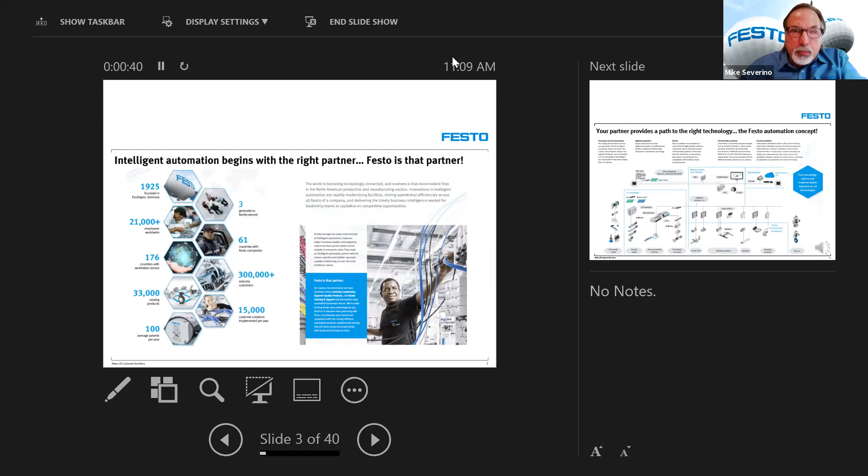Intelligent automation begins with the right partner. Festo is that partner. Founded in 1925, we have over 21,000 employees, 33,000 catalog products. We're privately owned, and we have the flexibility and expertise to serve our customers.

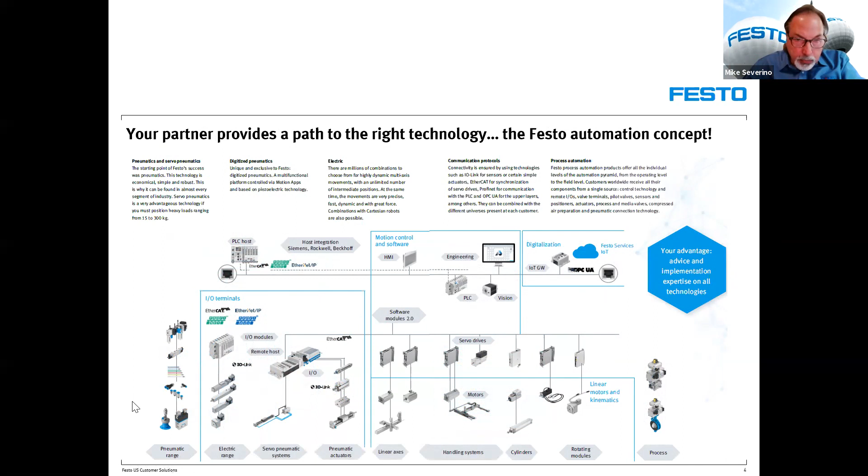Your partner provides a path to the right technology. Let's take a look at the Festo automation concept. Products ranging from pneumatics to electric to process automation, all that can be combined in one common architecture due to our open connectivity.

Our products and solutions are widely applied in a variety of industries. We back that up with a group of dedicated industry specialists. Our industry-specific solutions are tailored to your needs. What makes Festo unique is that we offer a wide range of products and solutions for factory, process, and lab automation. And within our standard catalog product offering, we can customize those to meet your specific needs.

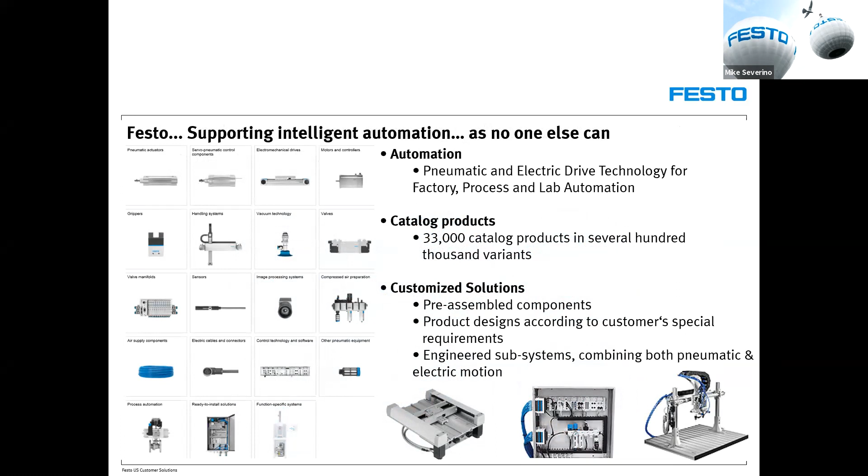Here's an overview of our pneumatic technology products. They range from air supply to fittings, actuators, grippers, and a multitude of valves and valve manifolds.

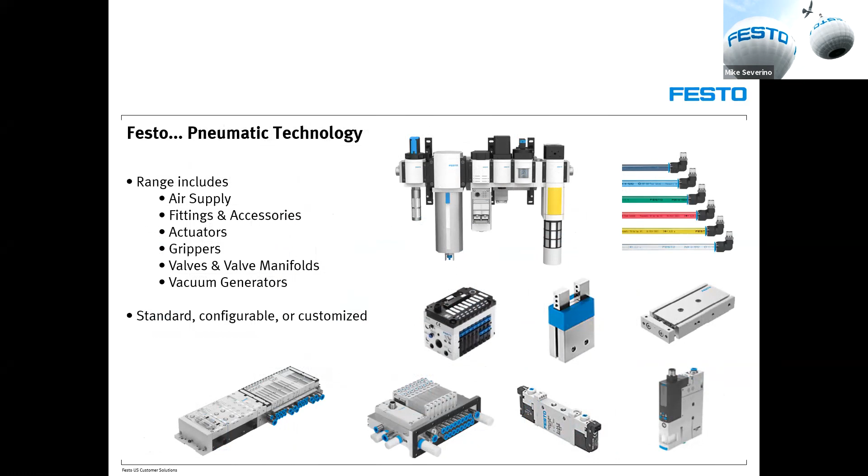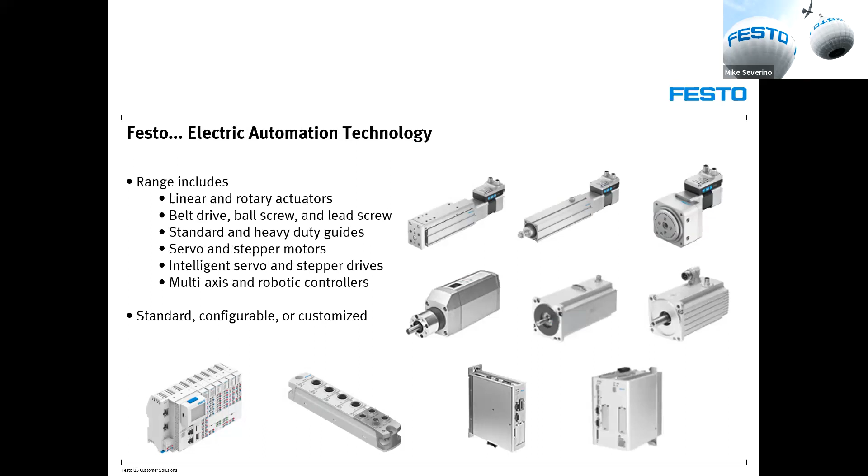Our electric automation products include linear and rotary actuators, servo and stepper motors, intelligent drives, and controllers. For a higher level control, we offer standalone PLCs for I/O and motion control. In addition, we can integrate the PLCs via our HMI, valve terminals, and machine vision.

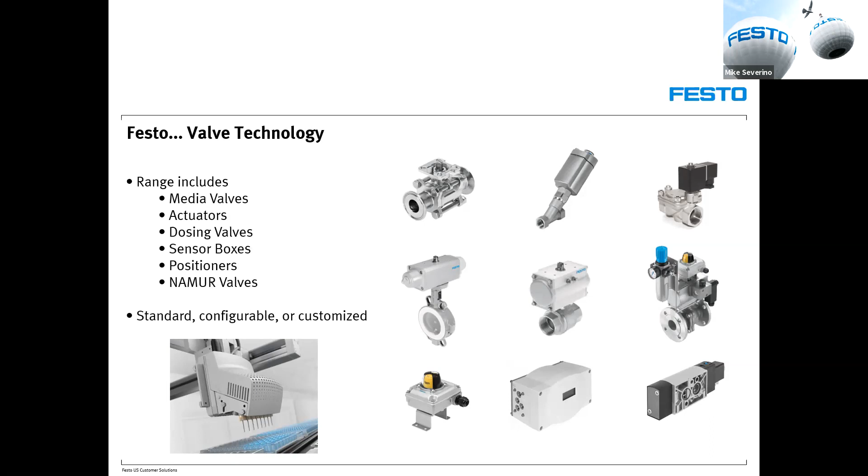And finally, our valve technology products, which range from the media valves to dosing valves to Namur pilot valves, and the accessories that provide control and feedback.

So how does that benefit you? Well, we can provide a complete automation solution from a single source. And at the core of that solution would be our CPX/MPA manifold.

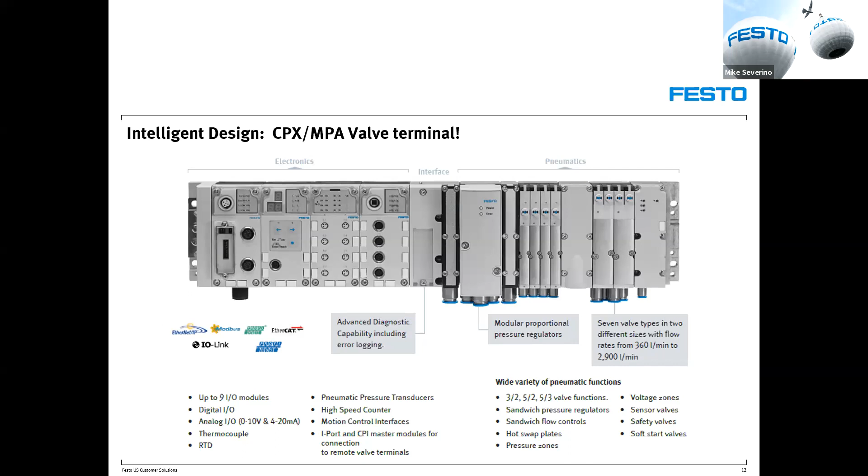As illustrated here, our flagship CPX/MPA valve terminal provides the ability to combine the electronics and pneumatics on a single node for easy integration into existing control platforms. And when you take full advantage of the diagnostics features built into the CPX/MPA, you can rest assured that any downtime will be minimized or avoided.

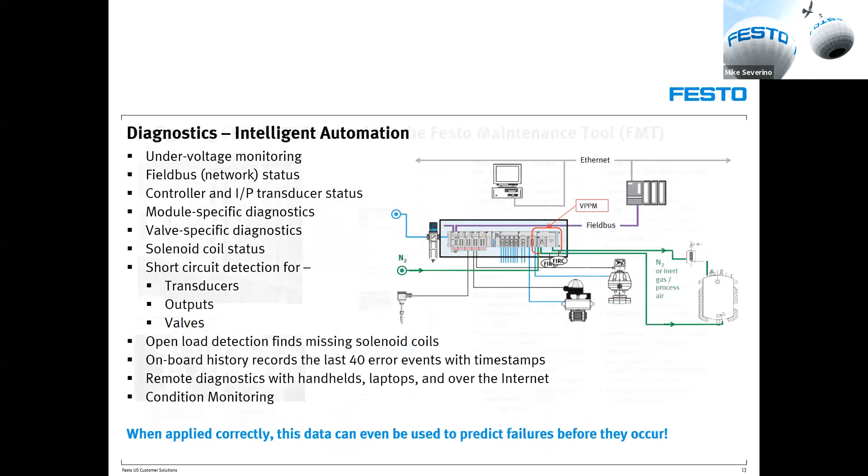So, how do we go about configuring the CPX/MPA terminal? Well, that's done via our Festo Maintenance Tool. It provides commissioning, testing, and configuration of the CPX valve terminal for a wide range of control platforms.

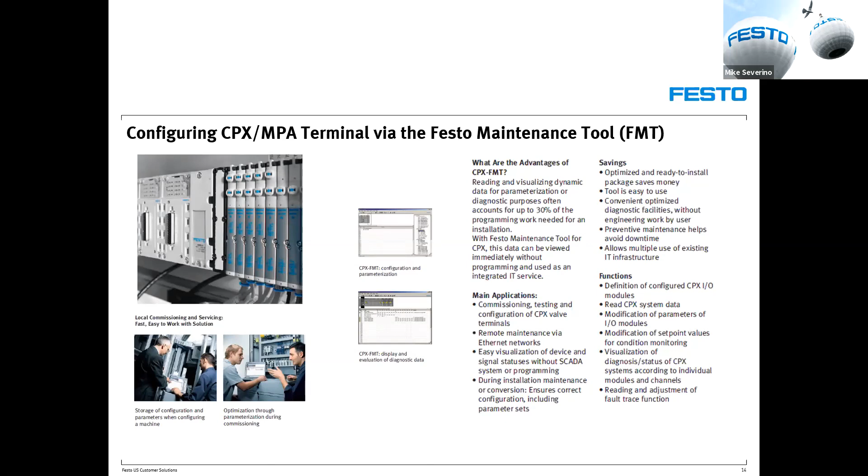One of the main features of the Festo Maintenance Tool is that once you go online, it'll provide an automatic configuration of the hardware. But if you choose to configure offline prior to receiving the hardware, you have that option as well.

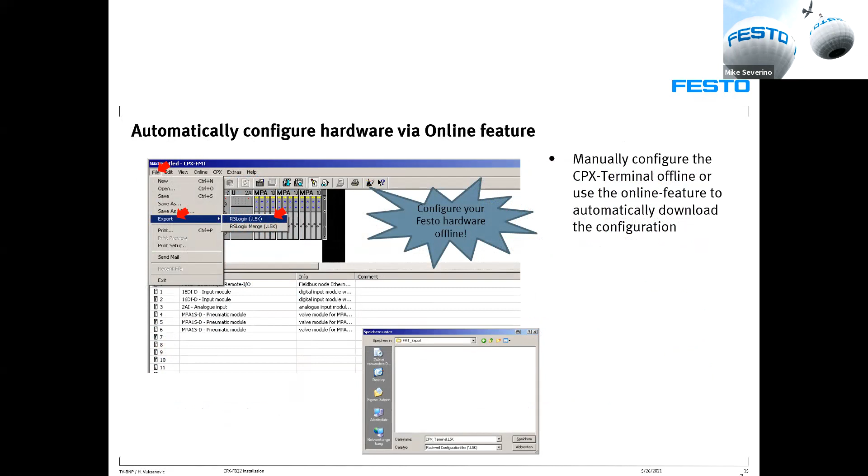Seamless integration to DCS and PLC systems is possible with Festo Maintenance Tool's export function. By utilizing this function, you can export all the tag structure information, including data mapping and description, and all the signal properties, including scaling and diagnostics, into a config file, and export it to some of the major controllers listed below.

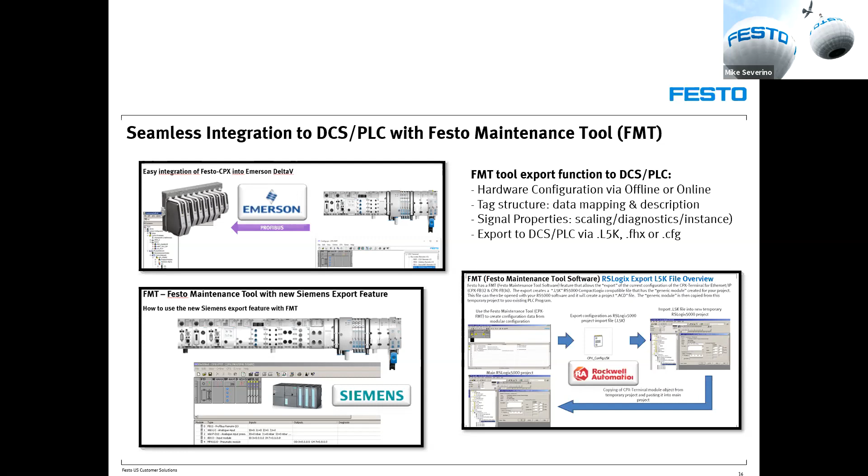Here's an example of the L5K export function. The first step, we would go online with the Festo Maintenance Tool to create the hardware config file. We would save that as an L5K and export that into RSLogix via a working project.

We would select the software version and controller type. We would then copy and paste that file from a temporary project to the main project, and then download to the Rockwell controller.

This feature will save up to 30% in engineering and development time.

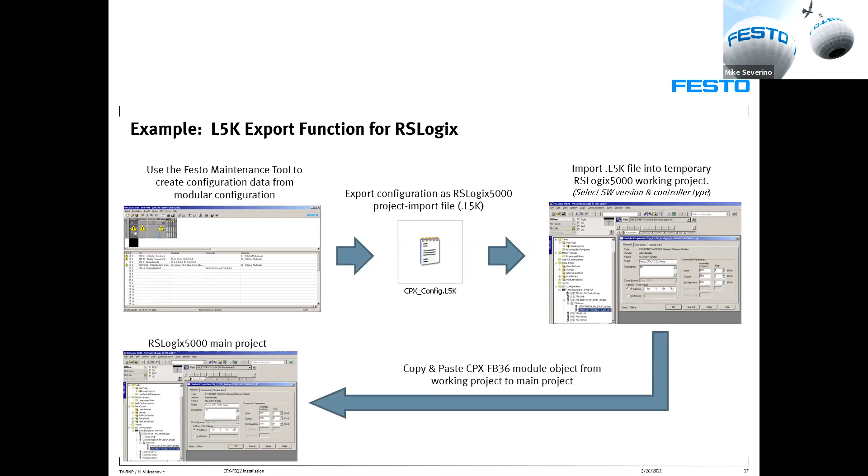So what are the benefits of the imported configuration into RSLogix? We end up with the correct data format and I/O size for all the devices on the CPX terminal. In addition, all the CPX parameters are stored in the RSLogix controller, including all the data mapping and tag descriptions.

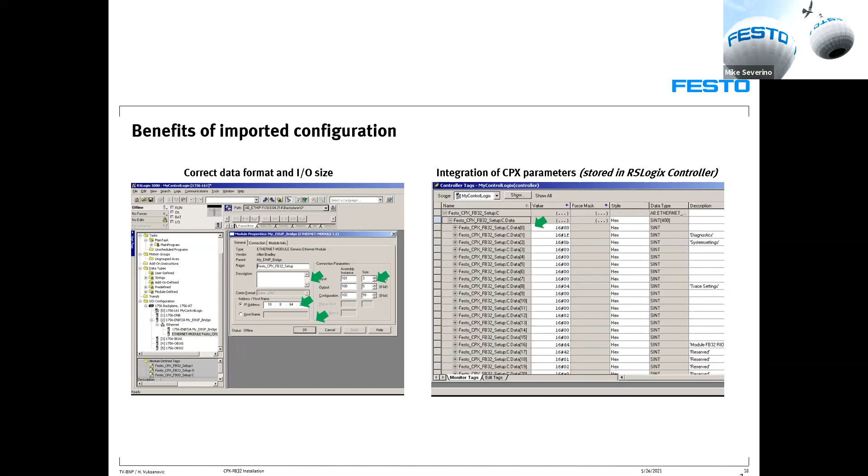Now let's discuss control cabinet design options for both process and factory automation.

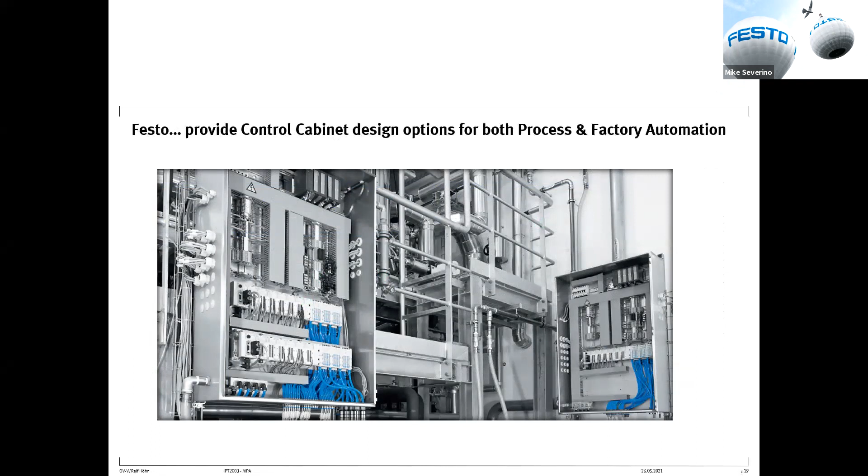Another aspect that makes Festo very unique is our Customer Solutions Group. They can provide a wide range of control cabinets suitable for factory automation, process automation, and handling systems. We can tailor those cabinets to meet your specific requirements and provide a mix of technologies.

At the end of the day, this is going to save time and cost for a ready-to-install cabinet solution, all from a single source.

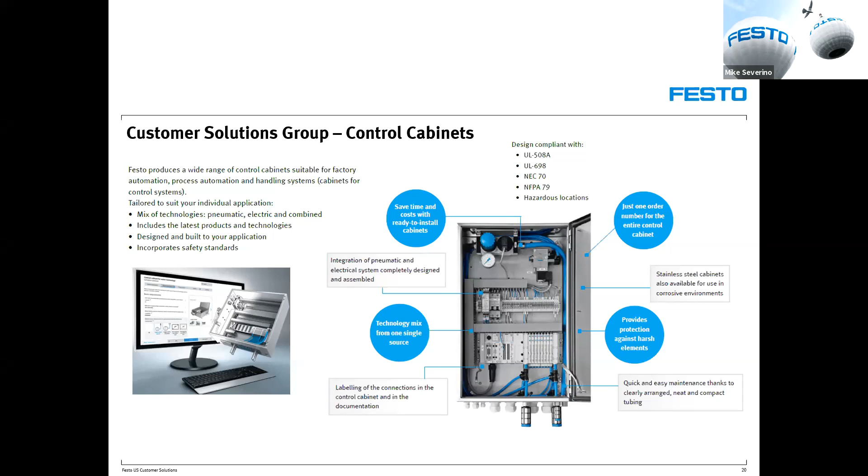As you can see here, we can provide a myriad of products for your control cabinet solution, and we'll test assemble this at one of our three factories and ship it to you for a ready-to-install solution. It'll include the complete turnover documentation package, and we can even provide startup assistance during commissioning and validation.

Our Customer Solutions Group has the ability to support large-scale projects. With factory locations in New York, California, and Ohio, we can support projects like MedImmune, where Festo supplied over 160 custom and standard design solenoid cabinets.

Or a greenfield project like Takeda, where Festo supplied over 200 standard and custom solenoid cabinets, or a plant expansion like GSK Montana, where we provided 50 standard design cabinets.

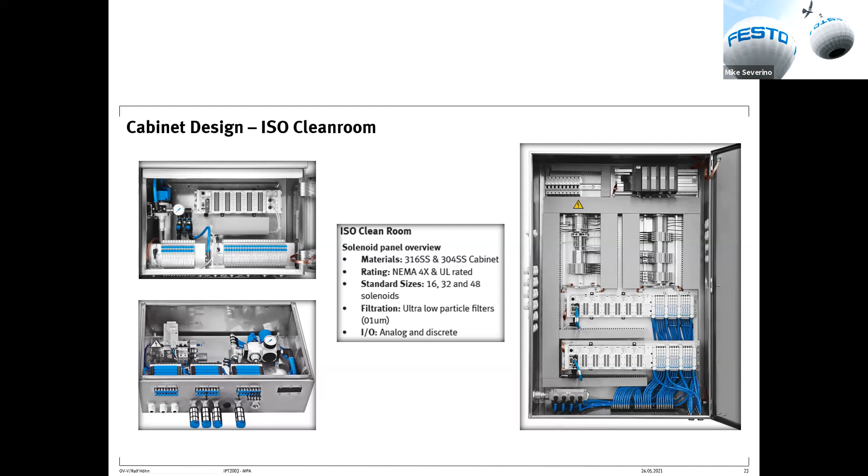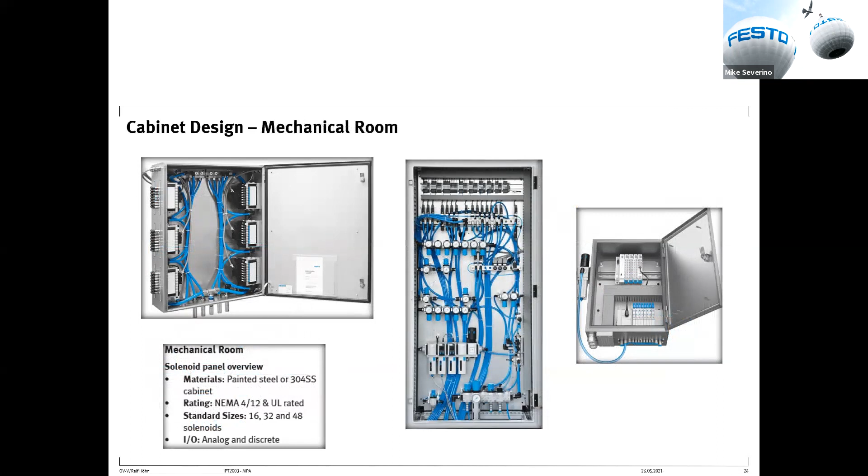And finally, the hazardous area, where it's imperative to have intrinsically safe I/O, Class 1 Div 2 rated components, and a NEMA 4X tight enclosure.

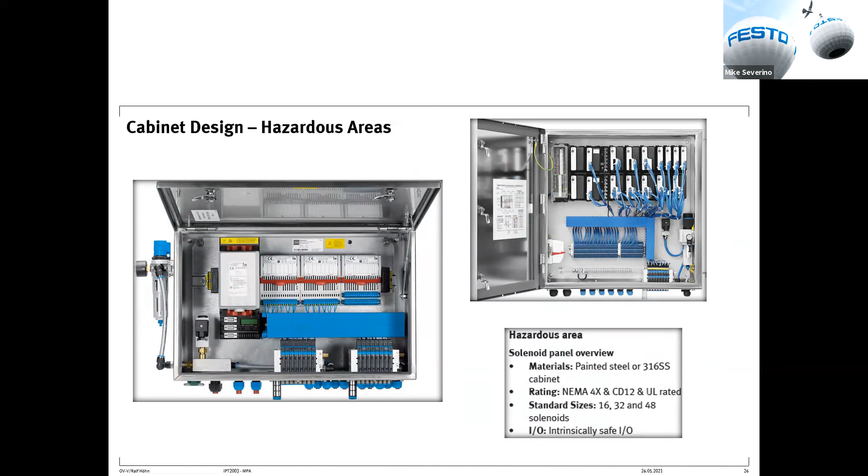Let's take a look at the energy efficiency module, the E2m.

Today, end users are wanting more intelligence and energy savings built into their manufacturing processes. This means they want automation equipment that utilizes smart devices capable of collecting real-time data from their processes and turning it into saving both time and money.

The E2m was designed to save energy by automatically shutting off the supply of air to a machine that has been sitting idle. This eliminates the continuous consumption of air due to system leakage, resulting in significant energy savings. Additionally, the E2m can monitor the machine's performance by collecting data on pressure, flow, and air consumption, assuring that the machine is operating at peak efficiency.

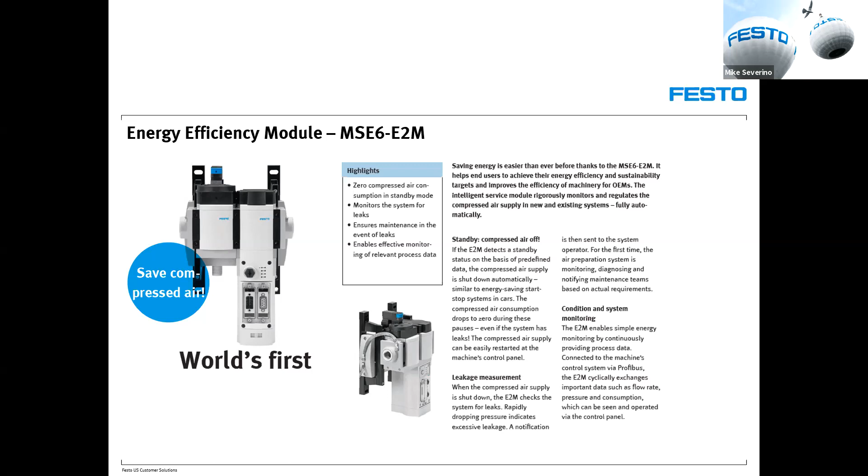The E2m modules comprise an electric on-off valve that's normally open, an interface for integration into Festo's MS6 series air prep system, a power supply, a flow rate sensor, an integrated pressure sensor, status indicators, and you choose your field bus.

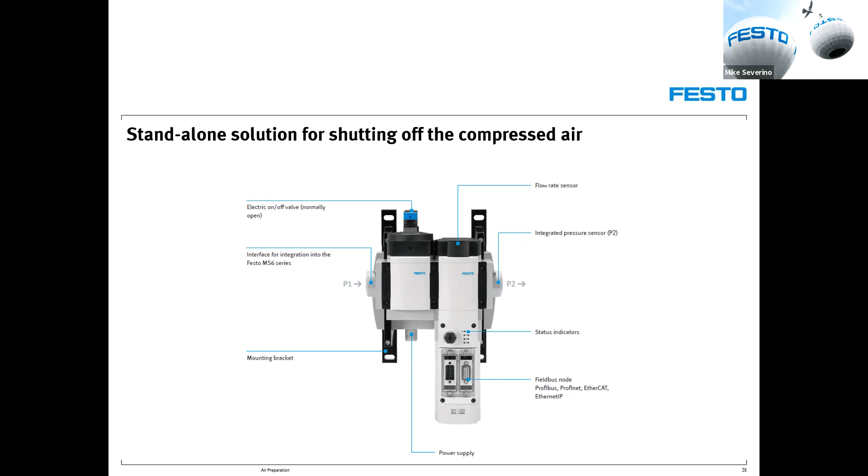In summary, the E2m collects data through continuous process monitoring of flow, pressure, and air consumption, and machine cycles, helping prevent costly unplanned maintenance and assuring optimal performance.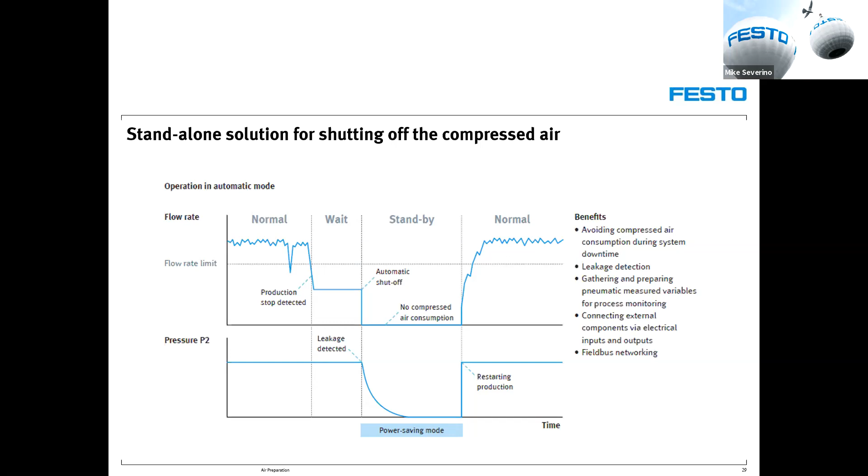You may ask, how much can the E2m save on an annual basis? Well, the example below is for a machine that has a flow rate of 5,000 liters per minute. Assuming a 20% leakage rate, a production time of 16 hours per day, standby time of 8 hours per day, and 265 productive days, using the calculation tool below, with the MSE6 E2m, you could save nearly $2,500 per year.

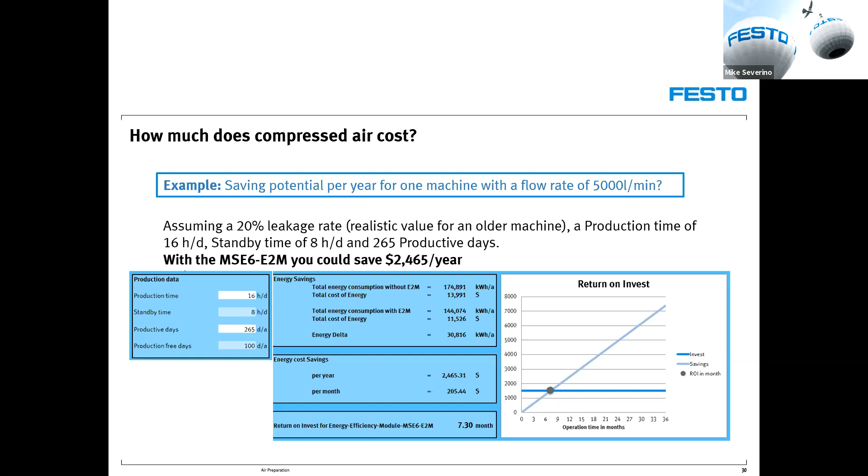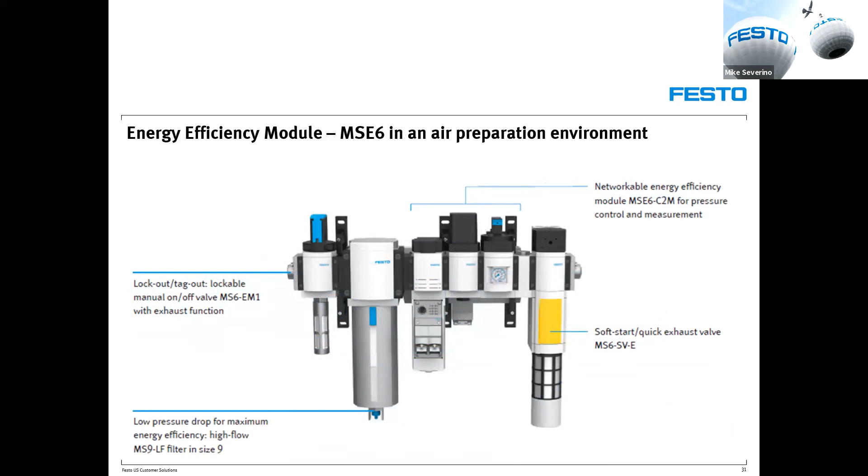In addition to standalone mode, the energy efficiency module can be integrated into the MS6 air preparation system, as shown here.

Now let's talk digital pneumatics. The Festo Motion Terminal VTEM is the world's first valve to be controlled using apps. Our motion apps allow you to integrate many functions using standardized hardware. Functions can simply be switched at the touch of a button.

Thanks to comprehensive diagnostics, condition monitoring, and improved maintenance, productivity is increased and production complexity is reduced.

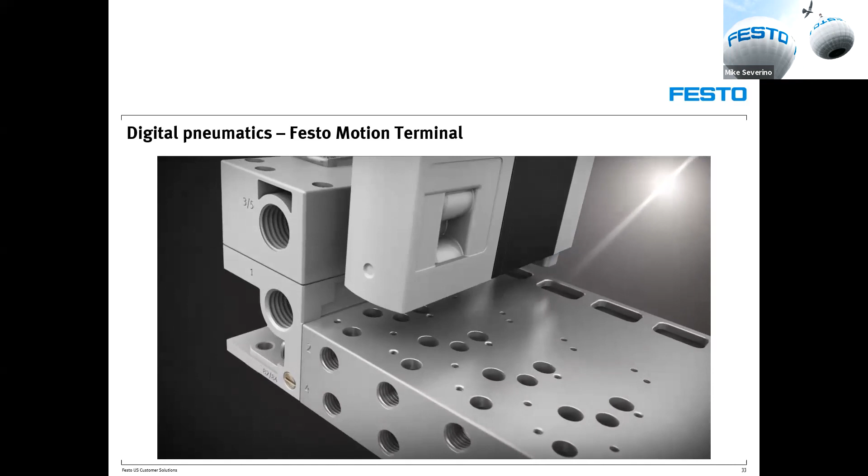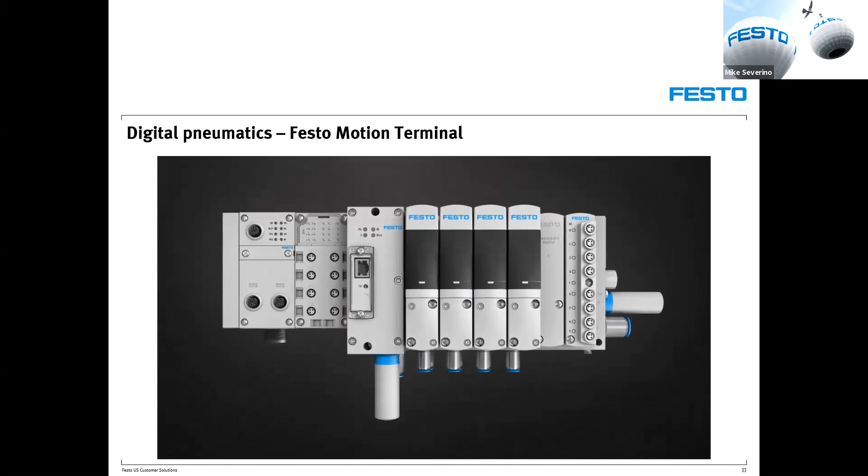Discover a new level of flexibility, one piece of hardware for all functions. Numerous functions can be combined with the same hardware, possible for the first time with the VTEM. No modification, no additional parts, no arduous installation, none of that is needed anymore.

With the matching Motion app, you can change functions at the press of a button, whether for a simple change in the directional control valve functions, general travel in the end positions, energy efficiency movements, or proportional characteristics of the motion profiles. That is how the Festo Motion Terminal combines the benefits of both electric and pneumatic automation.

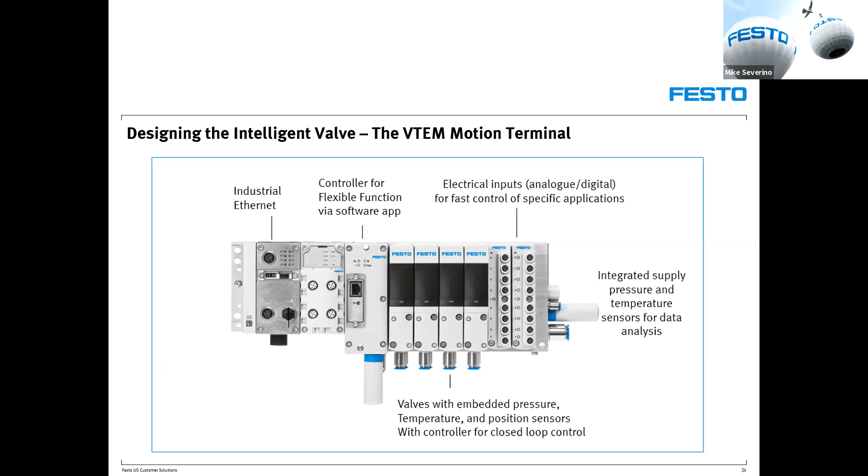As you can see here, the Motion Terminal replaces over 50 components with one piece of hardware and combines the benefits of electric and pneumatic technology.

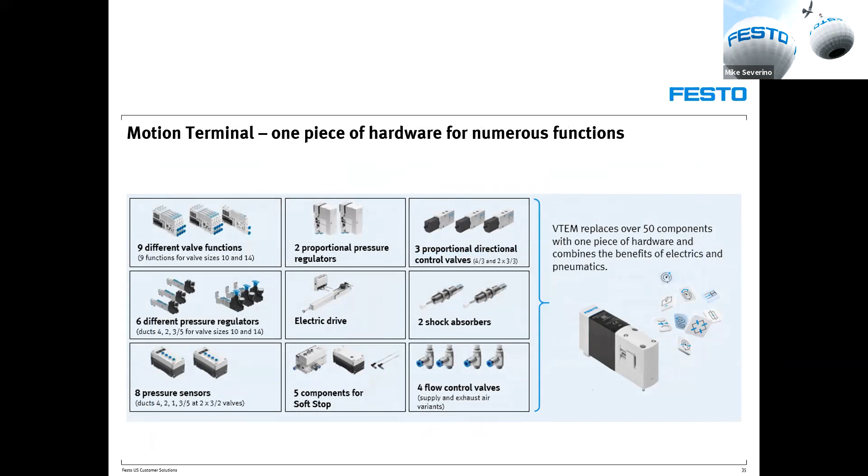Designing the intelligent valve is made possible by our patented Piezo Valve technology. As shown here, 4 pilot cartridges form a total of 8 proportionally controlled two-way valves.

Thanks to the integrated sensors and proportional control, which allows the valves to be pressurized and exhausted independently, this single valve technology can be used to execute a wide range of conventional valve functions and full system solutions, such as soft stop.

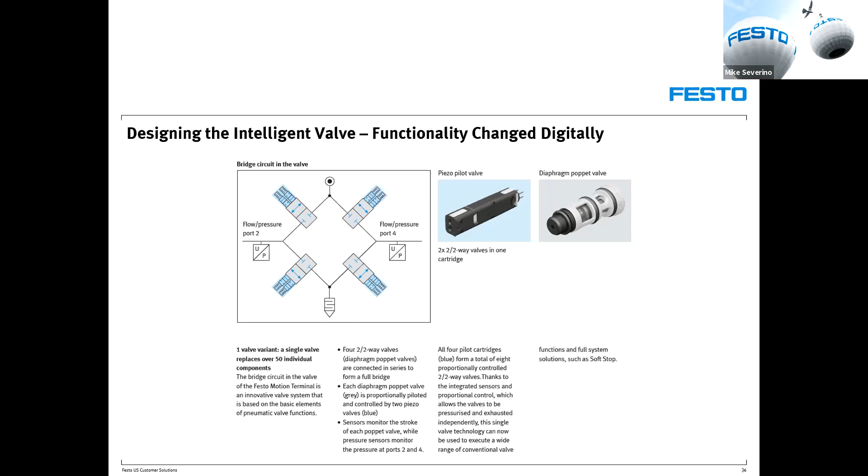Now we're going to demonstrate the soft stop app. Notice the vibration in the machine.

When we add shock absorbers, we eliminate some of the vibration.

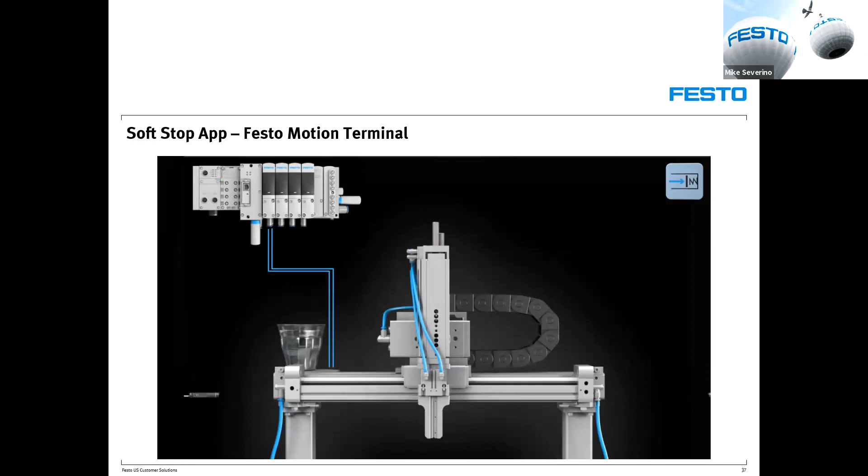By adding a motion terminal and fast-acting sensors, we eliminate all the vibration.

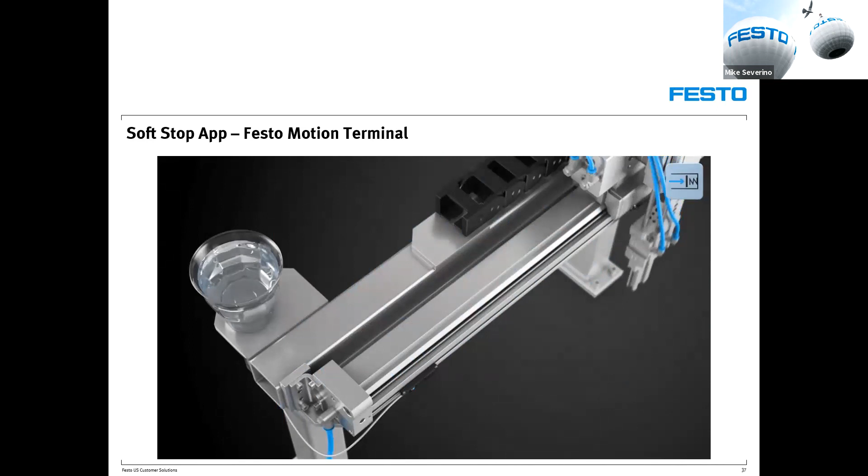The directional control valve function offers maximum flexibility for special purpose machines as well as for handling systems. You can modify standard directional control valve functions such as 4-2, 4-3, 3-2 at any time and as often as necessary, even during operation, as illustrated now.

This enables you to respond to a large number of requirements at the touch of a button.

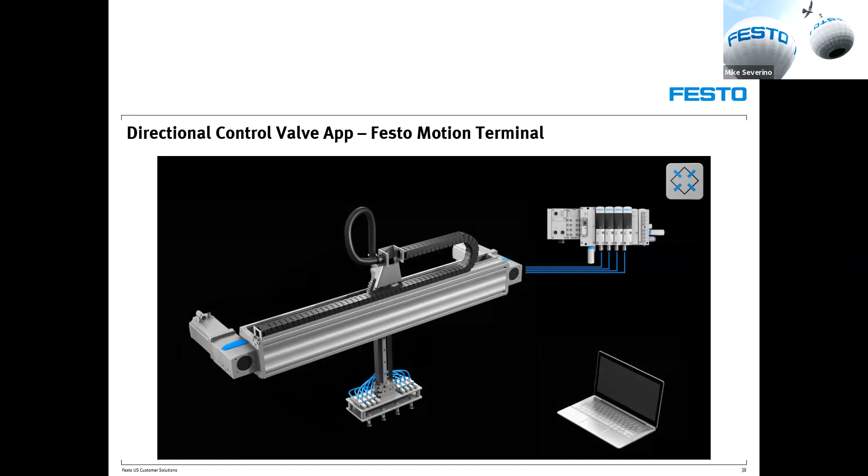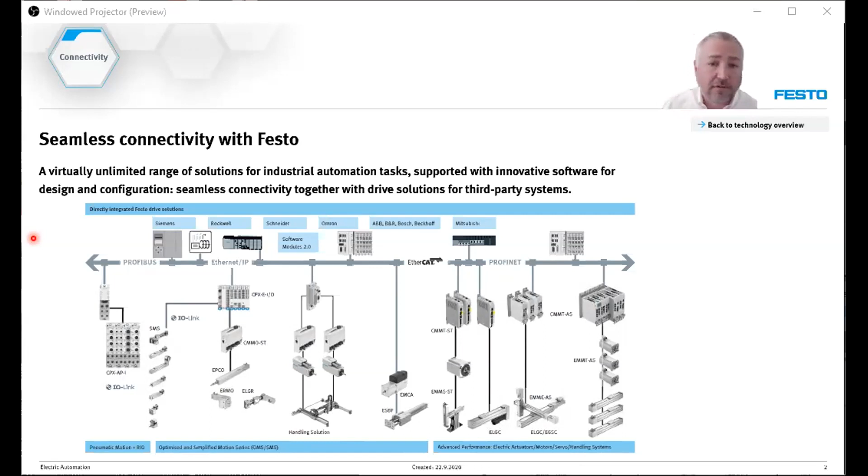So two products I'm going to talk about today. In Chris's presentation, he brought up the CPX-AP-I, that's an IO product for us that can be used in cabinet or on machine and is physically connected to our valves. The IO I'm going to talk about today would be in-cabinet IO, modular IO, that is centralized, and decentralized IO that's meant to be on machine and exposed to elements, basically.

Our in-cabinet modular IO is our CPX-E product. We can support multiple protocols, so really seamless connectivity. We can save money over IO that's native on the PLC, and we're pretty compact, so we can fit a lot of dense IO in a small space, saving space in your cabinet.

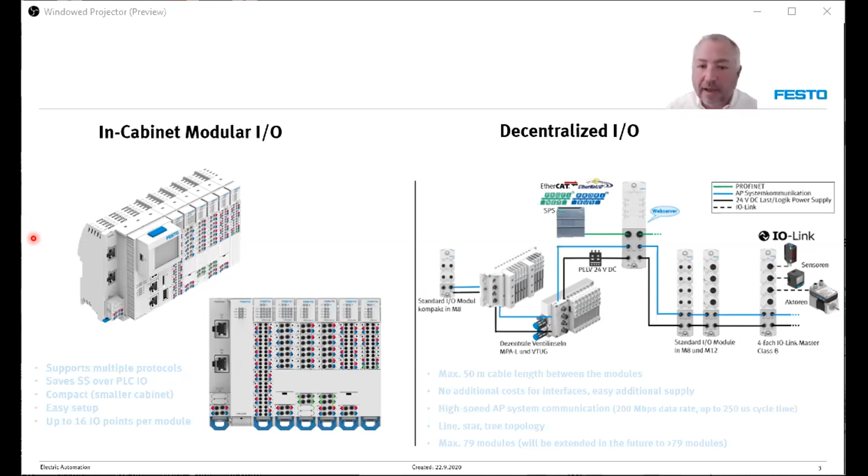On the decentralized side, we can really put a whole lot of IO on one bus node. So one field bus connection will give you a ton of IO and allow you to bring those IO points all over the machine or all over your plant. We can do up to 50-meter cable lengths between modules, and our backplane is incredibly high speed. So I'll get a little bit more into each point of that.

Starting with our CPX-E in-cabinet IO product, there are two major target use cases for this. The CPX-E comes in a PLC version/motion controller, where you can run that alone. We use CODESYS as the software, but you can run that alone. You can run full motion systems with drives. You can control digital IO and analog IO, as well as pneumatic valves and other products.

The other flavor of the CPX-E can just be a complete remote IO system. So if you're using a host PLC, you can just use any of the field buses that we support and bring it out to a bus module and stack up the right types of IO blocks onto that you need. Again, it's very compact, it's dense, and saves you space in the cabinet.

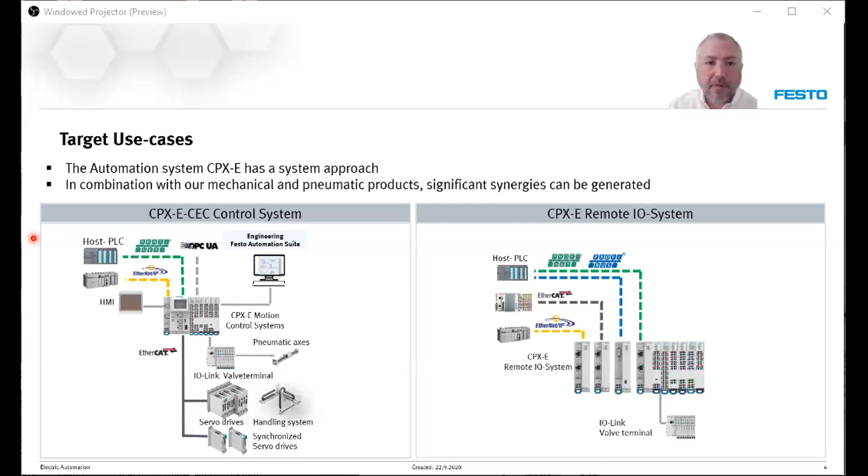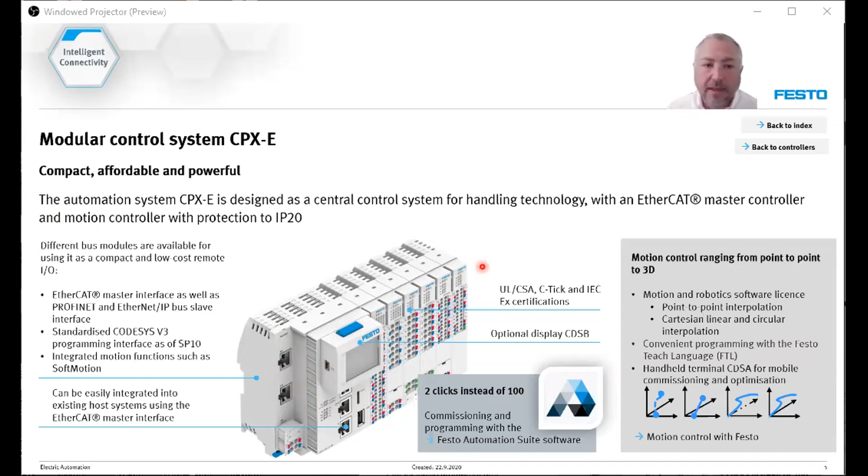Here's an example of our CPX-E as a motion controller setup. We do have an EtherCAT master built into it, so we can control EtherCAT devices. We allow you to connect with Profinet or EtherNet/IP if you want to use a host PLC to connect up to it, and we do have a built-in switch on it. We can support full 3D interpolated motion. This again is meant for in-cabinet, so it's an IP20 device.

Getting into the modules that we support, there are a number of different types of PLCs and motion controllers you get, whether you're looking for interpolated motion or something that's not as powerful and a little less expensive. We can get down to a basic controller that doesn't have all the bells and whistles on it, in fact no EtherCAT master if you choose that. Or you can get the bus modules that don't have real intelligence built into them, so no programming capability, but it does allow you to expand your IO from your PLC. So you can buy one of those.

The options that you have for IO would include a 16 digital input module, so 16 digital inputs in about a 24 millimeter wide slice, an 8 digital out module, a 4 analog in, a 4 analog out, also an IO link master that we can handle 4 IO link devices on, and a high-speed counter module. So fairly diverse cards that you can slide into this rack.

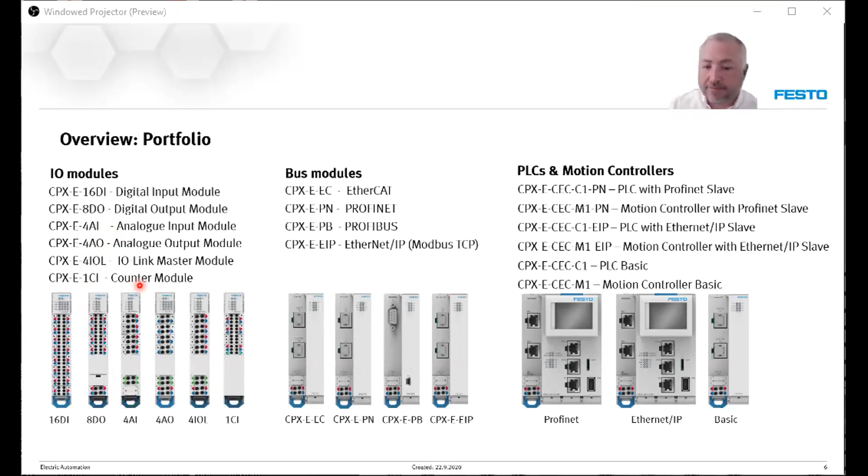One of the advantages of the CPX-E is that you can separate power and create power zones within the IO block itself. So in the instance that you want to maybe cut off some outputs in a safety situation, you will be able to do that, but still have power to your data. You're still going to have feedback as to what's going on in the machine. You're still going to be fully connected to the controller side of things, but your outputs can be shut off. So for each different output module, you have a connection. You can either daisy chain those from one to the other or put a separate power supply in.

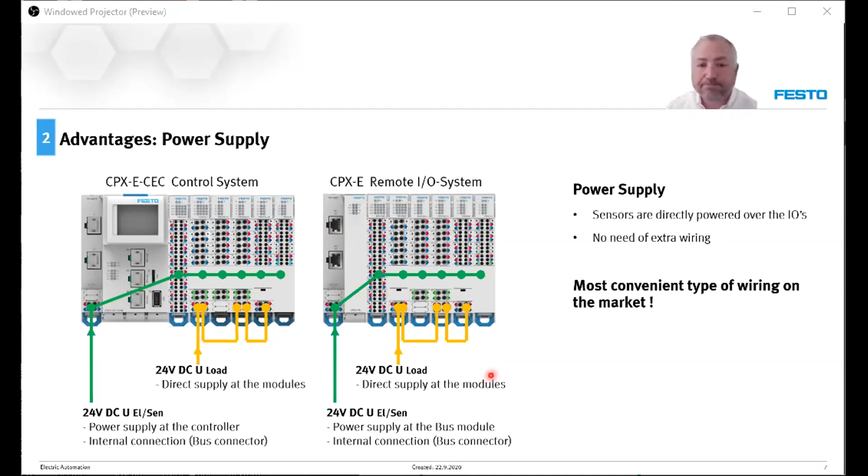Onto our CPX-AP-I product, this is our decentralized IO system. Fairly new product for us, been out in the field for about a year, and it's a fantastic product. The things to know about this is it's meant to be on machine, no cabinet needed for it. It has both protection that's rated for IP65 and IP67. So if you're in an environment where it's going to see a little bit of water and some dust, that's not a problem. We can control different IO modules with it, and that includes valve manifolds.

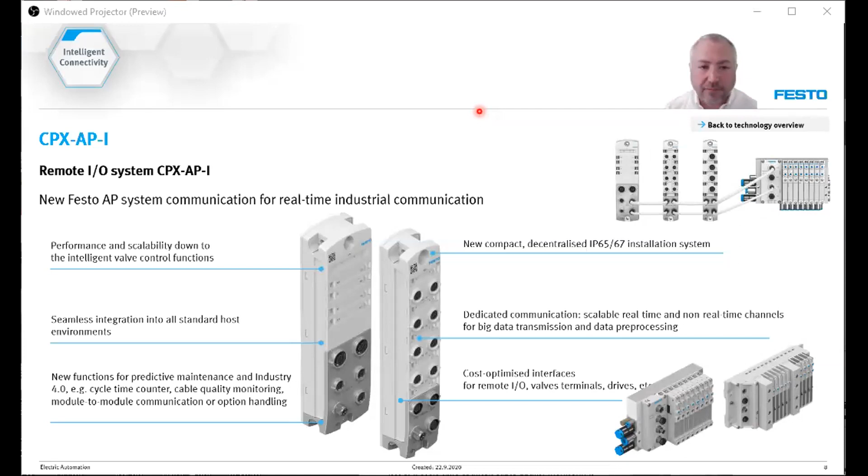So a simple setup, and this is kind of an example of how you may typically see it set up. You're going to have your host PLC, whether it's ours running EtherCAT, Siemens running Profinet, or Rockwell running Ethernet IP. And you're going to bring your field bus out to our bus module here.

We then break off of that with a backplane that we call AP. It's a very fast and robust backplane where we can connect up to a number of different modules, and we can split off on 2 different sides of this. So you've got your field bus connection here with a switch built in, so you can connect an HMI or some other device. Now it breaks off into the AP backplane, and we can do up to 79 modules it's tested for now. Theoretically, we can do up to 500 modules hanging off of one bus node.

So what's that allow you to do? So if you've got, say, an Allen Bradley PLC with a little less processing power, and that less processing power restricts how many IP addresses you have, well, you can still hang a ton of IO off of one IP address. So it limits the amount of IP addresses you might need through your PLC.

But it also makes for cleaner connections. So you basically can daisy chain the backplane up from one module to the next. And we've got power separated as well. So 24 volts, 4 amps. So we can separate the power. Again, in a safety situation, if you want to take one output block off power, say, or if you're going to be running things like valves and you need some extra power, you can put another power supply right in line there and feed that power to the valve manifold.

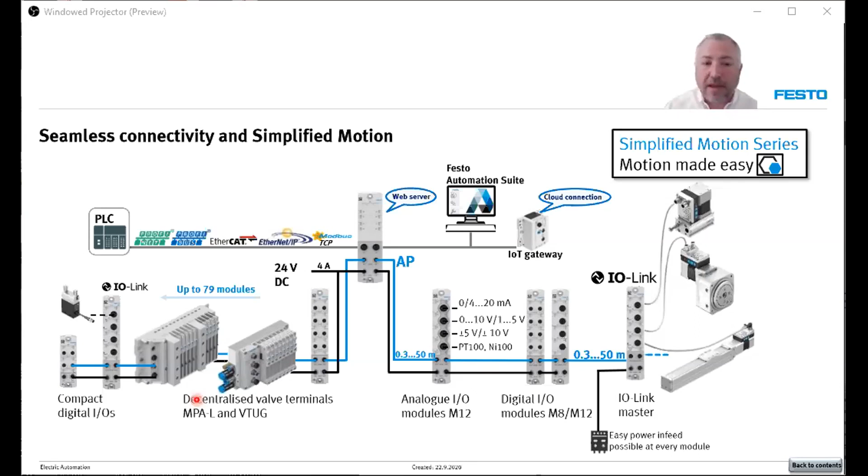We use M8 connectors for the power and for the backplane. These are standard Ethernet M8 connectors. There are multiple third-party manufacturers making them. We make them and sell them, and there are other companies out there that make them. So they're standard cables. They are not proprietary to Festo at all.

We can do up to 15-meter cables between each module right now. We will have 50 meters available very soon. And we have tested it up to 80 modules off of one bus node. We do see the capability of being able to do 500 in the future, however. We can support a line topology, and there's also going to be tree and star added to that.

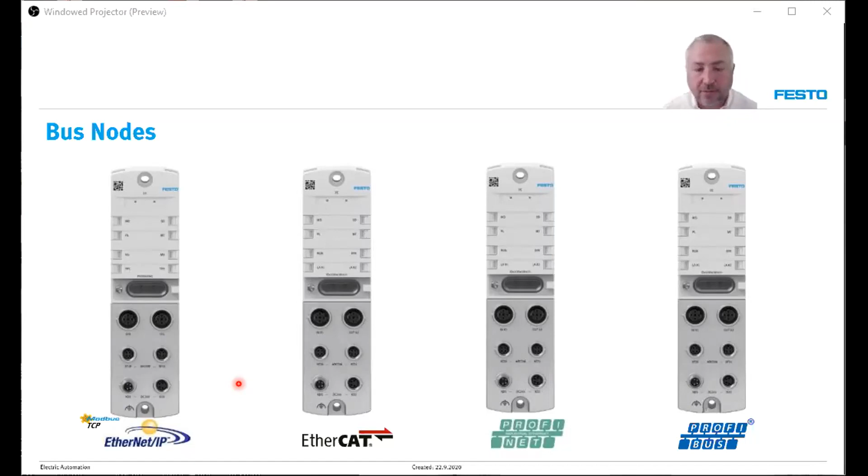So what do we have available for modules that can connect to these bus nodes? We do have digital input modules. So we have a 4 in and a 4 out that comes in both M8 and M12 variety. We have an 8 digital in, again in M8 and M12 connectors. And then we have a compact 4 digital in, so that it comes in M8 only.

Our analog module supports both current measurements, so 0 to 20 milliamps and 4 to 20 milliamps, and voltage measurements, so 0 to 10, plus or minus 10, plus or minus 5 volt, and we can support RTDs.

We also have an IO Link master, and that IO Link master can support 4 IO Link devices on it. But again, because these are modular, and because you can extend these out, you can connect as many as you want, tested up to 80 modules per bus node. So you can have multiple IO Link masters on this one bus node. You can have multiple analog, multiple digital in and digital out.

The last part of what you can hook up to this CPX-AP-I bus node would be valves. So this supports our VTUG valve manifolds right now and our MPAL valve manifolds. These are popular valves for us, and we can handle up to 24 solenoids per valve manifold.

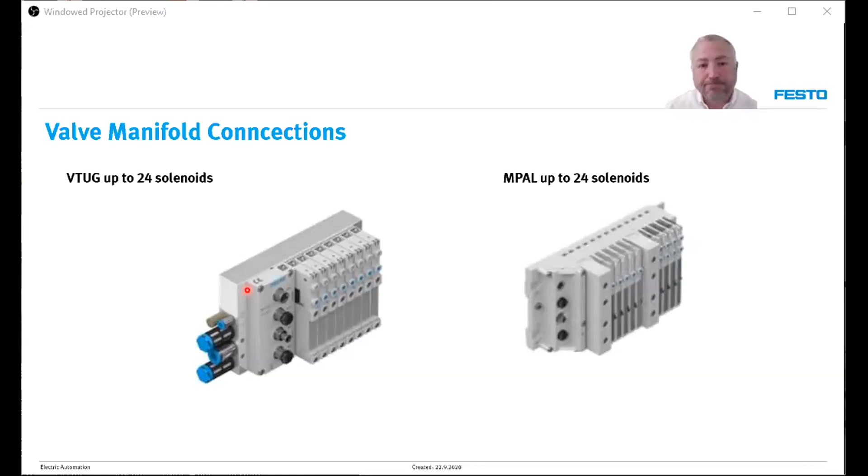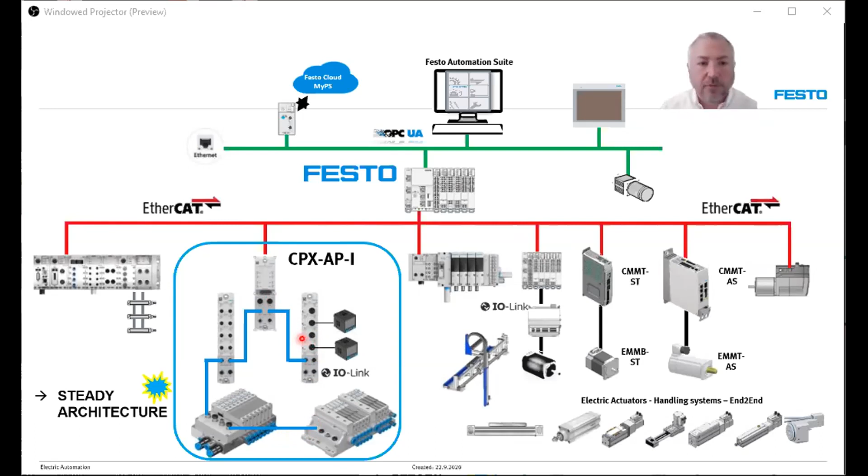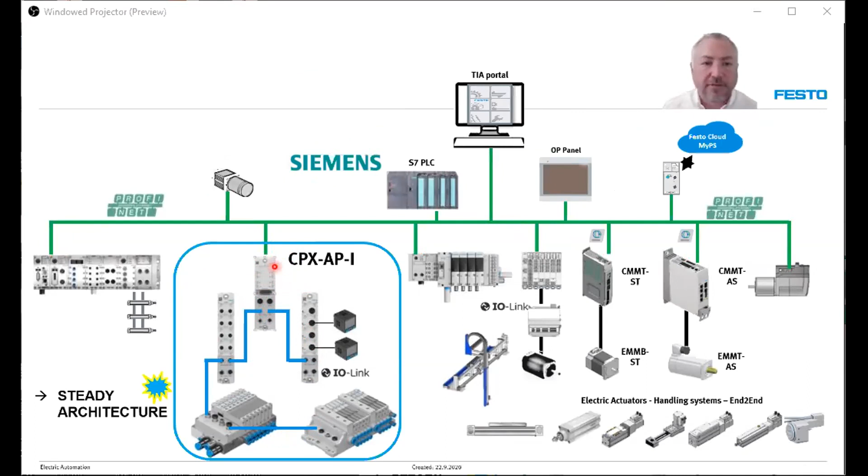To further illustrate how we can seamlessly connect with third-party PLCs, you really just need the bus node that supports, say, EtherCAT in the Festo environment, since we use EtherCAT masters. The modules and valve manifolds stay the same no matter what field bus you use. So in the Festo environment with Beckhoff, we'd use EtherCAT, and we'd have the same setup. With Siemens, all you'd change is the bus module, everything else stays the same. Omron uses EtherCAT, Rockwell uses Ethernet IP, which in North America seems to be the most popular. So you can connect to any PLC you want with this architecture.

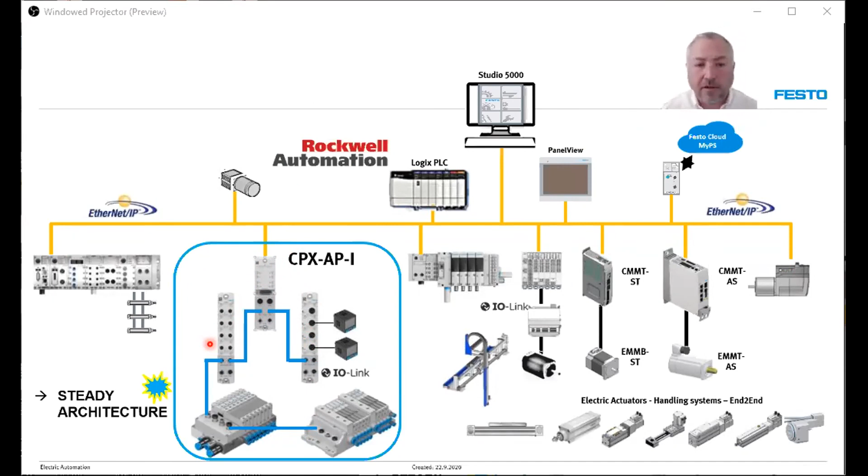Thank you, Bill. Great presentation. Thank you, Bill, and thank you, Mike.